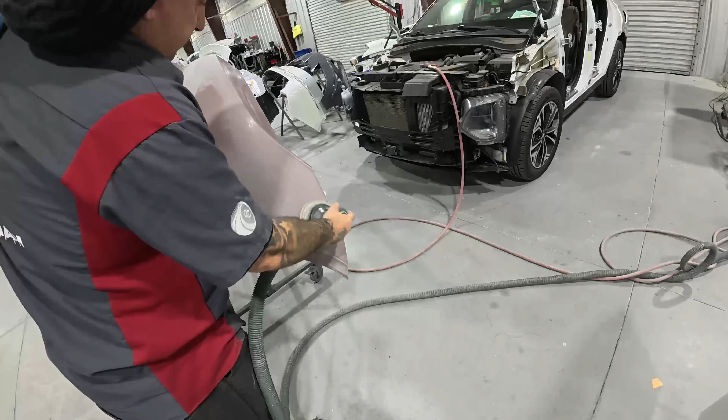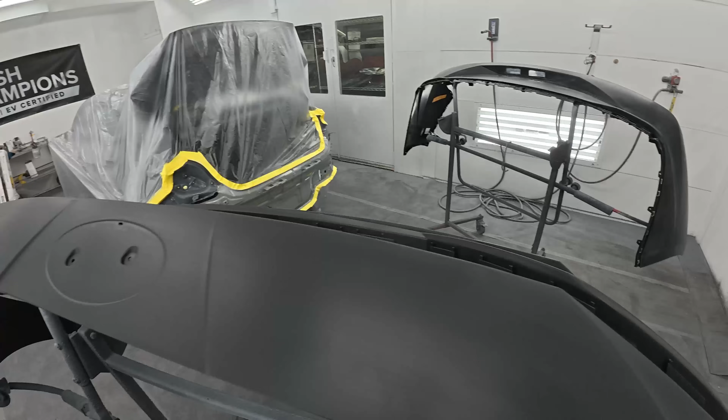All right, so now we're gonna go ahead and get our camera reading, and we are gonna polish up the quarter panel on this one. We're not gonna use a compound. We're gonna go to a finer compound, which is a glaze, because this is a newer vehicle, but you wanna give that camera the best chances of reading that color, because even the slightest bit of towel marks can sometimes throw that camera off a little bit.

So we'll get it polished up, and then we will clean off the glaze, because sometimes the glaze will leave oils and some type of a color change to the panel, and you could pick that up when you're doing it. So make sure after you polish, you clean it off. That way you get a true reading of the color.

All right, so this has been calibrated in the last couple of days, so we're not gonna have to do that. And now we're gonna go ahead and make sure that we get a nice reading. This one here does 5 shots, so it's gonna take 5 camera shots of the color. That way it can check the face, flop and all the angles, different things that it does. So sometimes there are cameras that take more shots or less. We have ours set up for 5, and that's worked out good for us.

So when you get your first shot, pull your camera off the panel. That way when you put it down, it refocuses in, and it could try to get a better match. If you leave it in the same spot, you're gonna pick up that same match. And a lot of times that comes into play when you're doing maybe the other side of the bumper. So you could use this side of the quarter panel and then shoot that side of the quarter panel. That's something that I have done in the past, and it does help you out. So we will lift it, and then we will continue on to get our 5 shots.

So what I think I'm gonna do is, being that this one here says it's a 71 for the standard, and this is a service formula with a 78, we're gonna go ahead and do the 78. Sometimes you cannot trust that number on the right hand side of it. What I'll do is mix up that 78, see what we got for a camera shot, and go from there.

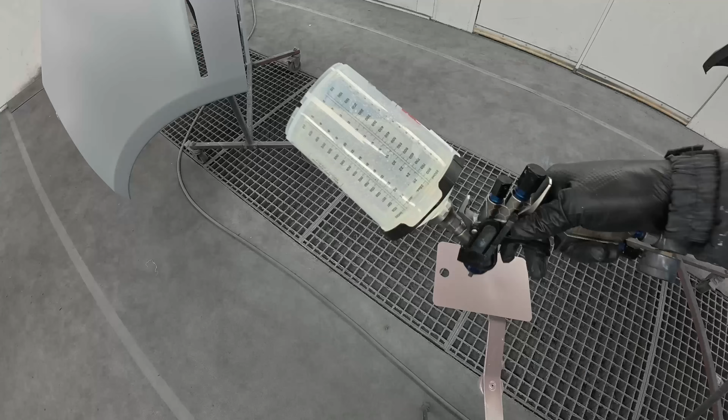All right, we've got it all cleared up, and we're gonna go ahead now and check it. And you guys see we're doing other jobs in there with that bumper. We're never gonna just stick a bumper in a spray booth by itself and slow everything down. You wanna maximize each load, that way your day will be the best and you'll have the best amount of hours each day, because we are commissioned at this shop, so we do everything to get the most through the booth, but still give it a quality job.

So check out that color. You guys can see that that is a great match. Even as the 78 wasn't really the greatest, a lot of times the camera will pick up the sealer if there's not enough base on some of these newer vehicles, and it throws off the actual match. So you're always gonna want to resort back to the normal spray out card.

That is what we are gonna be seeing. That is what the customer is gonna be seeing, and that is gonna verify that we are gonna have a good color match. So use the camera to get you in the ballpark, but a lot of times don't go off of that number that it gives you, a 78, a 90, if it's in the green. Check the details, check your graph, and then spray your card and always verify it.

That way you know this is what we are gonna have, and we use the correct sealer recommended by the actual Glasurit system. So we know we've got a good match. We're gonna go ahead now and get that thing based out and get it cleared up and back on the vehicle.

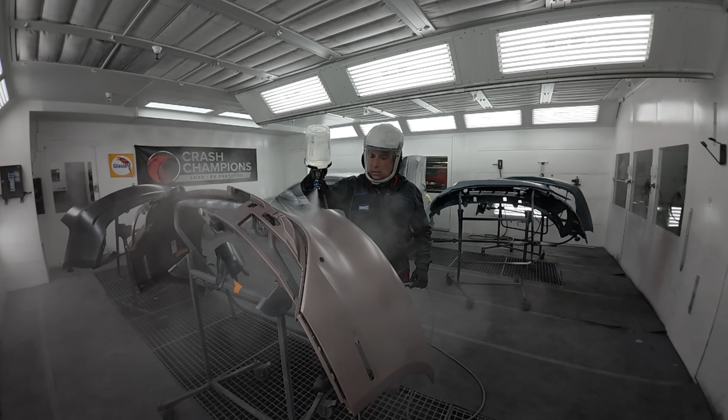All right, so the bumper is gonna be going on the vehicle, and in the meantime, my man Pat is in the shop, and I want him to go over with you guys how to read that graph. That way you guys are gonna have more knowledge on it, because I'm still learning it. You guys know we've only been doing this now with the Glasurit for about 10 months, and every time Glasurit does a software update, they try to make it even better for us.

That's why they did the new one with the metallic size, because that really will help you out to see the color, see the metallic, and even see the flop on the top and bottom. So we'll go over the colors on the computer to see if the one that we pick is gonna be the best one. Even though it may look good, sometimes there may be a better match by going in that graph and looking at that really in depth.

All right, so here he is, the man himself, and he's gonna go over with you guys what to look for. That way you are gonna pick the best one. And so we're gonna go to the color that we had. You guys see we did some other colors, obviously, since this Porsche color, but we're gonna get into the details and how to look at the graph from Pat.

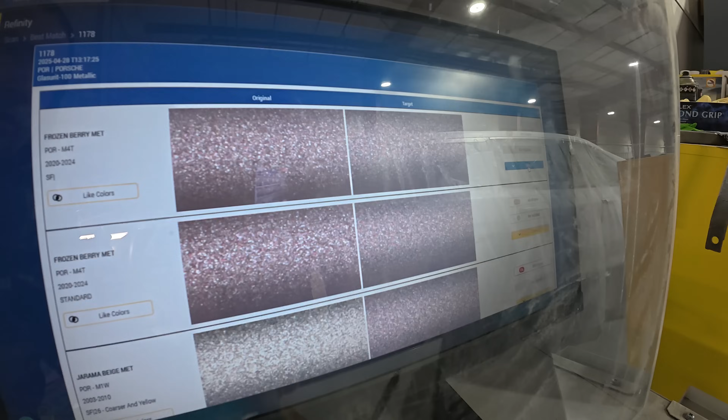And don't let this yellow 78% mess with you too much. The percentages don't really mean a lot. It's a starting point. So always hit details here and bring up more options. So it gave us 5 more options, and it looks like the first one and the second one are contenders. So we're gonna hit details here on the first one and look at the graph.

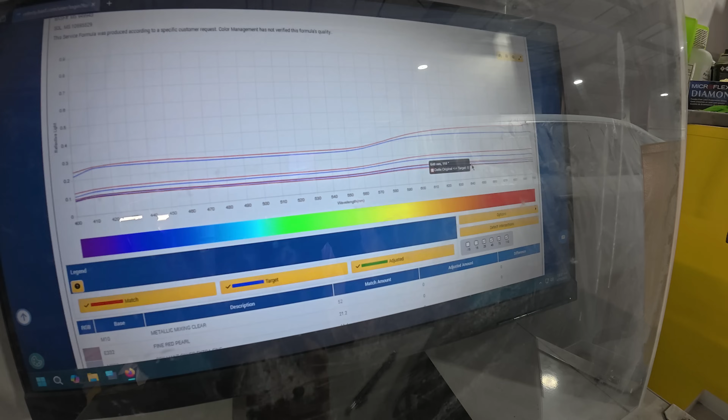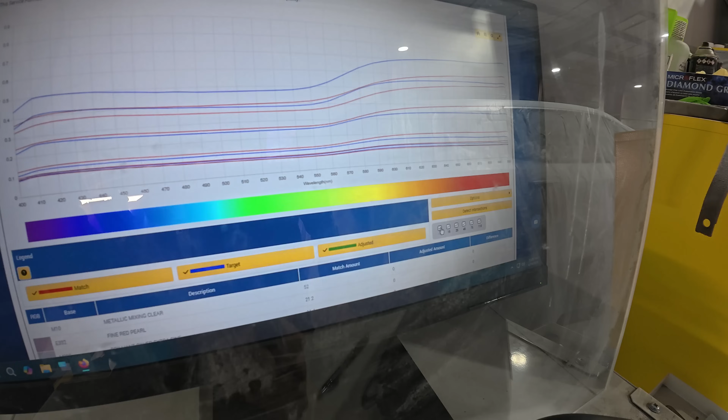So this angle is a 25-degree angle, 45, 75, and 110. You can come down here at the bottom and you can also click these other 2 hard angles on, the 15-degree angle and the negative 15. Especially for a bumper, you're gonna wanna look at these different angles. That's the flop, right? That is. And we're gonna hit detect intersections.

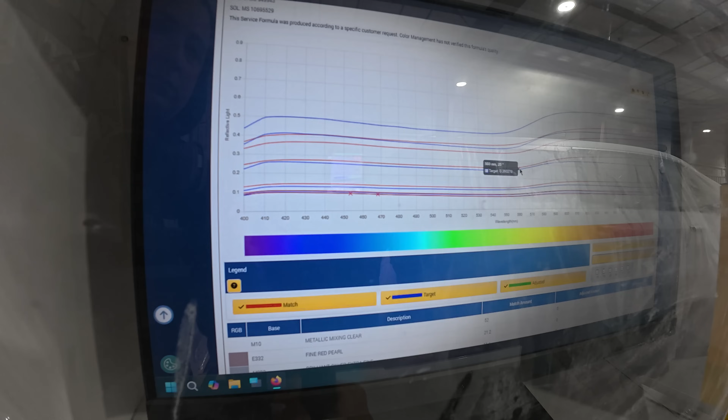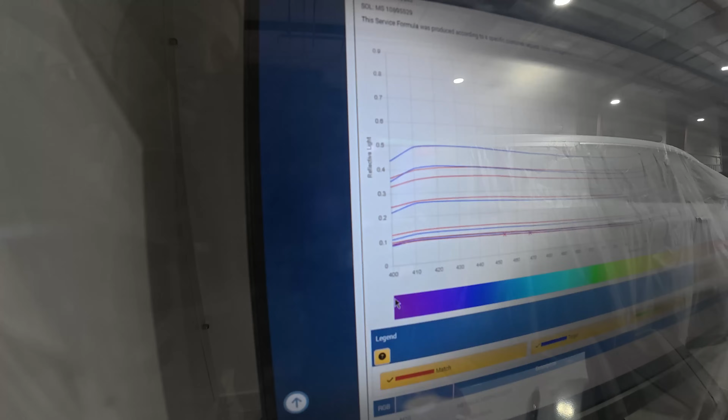So we have a few detections down here on the violet. So they're not hard crosses, they're touches, but anytime you have a detection is a concern you want to look at. So this graph is telling me that our target on our -15 is up top, so your graph, lighter and darker, is over here to your left, and your color spectrum is running at the bottom. So wherever you see an intersection, that's where you could have an issue, color deviation.

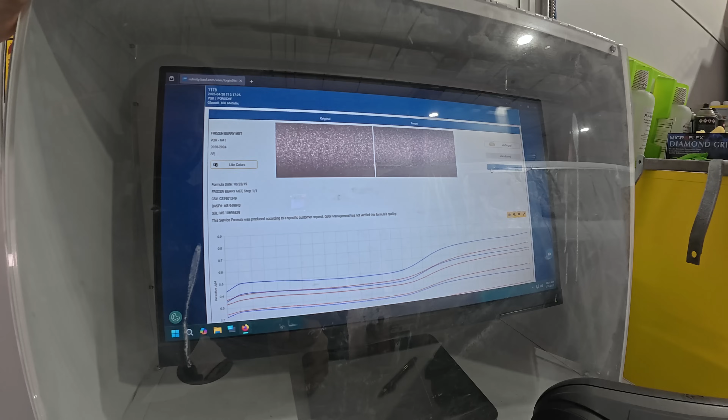So we have another one we're gonna look at. That was a 78%. Hit details to collapse that. We're gonna open this one up as a 71%. This second one, detect intersections, it has 1. Always check your colors with the spray out for sure. And we sprayed that first one and it actually looks good.

So is that something that maybe just the computer is seeing something differently? It is. Maybe just a hair better, but it's not something that maybe the human eye would even pick up. The graphs are showing it is a little better, and it had a lower percentage. Right. So it's kind of... Don't chase those higher numbers. Right. Spray them out, check them, and look at the graph. Look at the graph. And that'll really get you in the ballpark.

So, all right, so we are gonna get that vehicle all buttoned up. You guys will see my man Brian put the bumper on, check the color out in the sun. We did have a good spray out card, even though that camera and the software told us that that second one might be good. I relied on the spray out card and went with the first one, which was a better percentage rating, and we'll get it on there and we'll check it out once we get it all built.